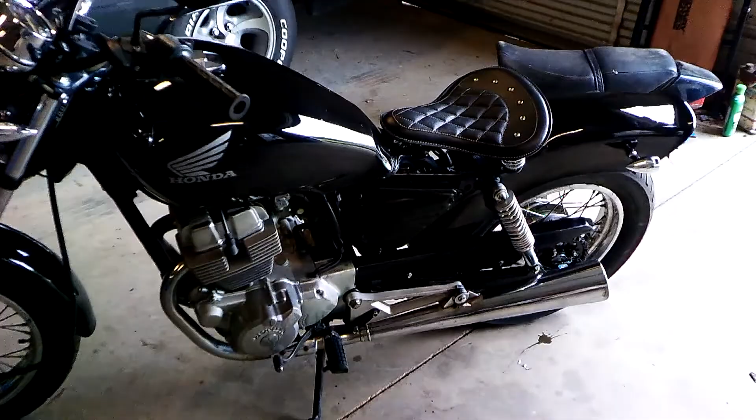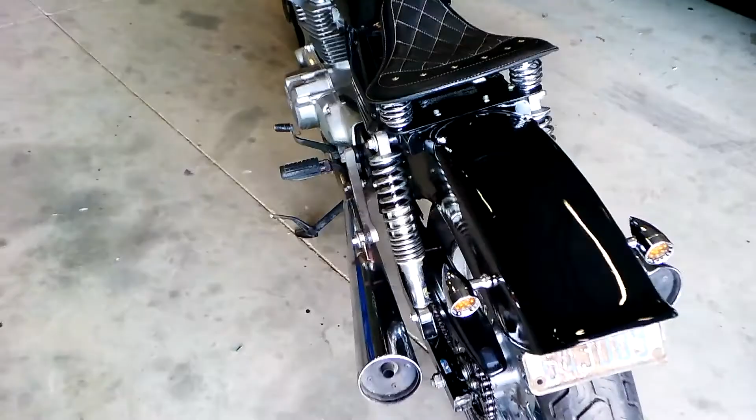Okay, here's my finished Honda Rebel Hawk. This is the Nighthawk gas tank. I bent that tab in. I cut the tab off this air filter. I took the rear pegs off. Here's my tail lights and brake lights.

If you needed to adjust the fender a little more, you could put body shims up under here. I tied my relay and my fuse box up here with black tie wrap. I think these handlebars look alright just like they are. Seems like some people want to change things just to be changing things.

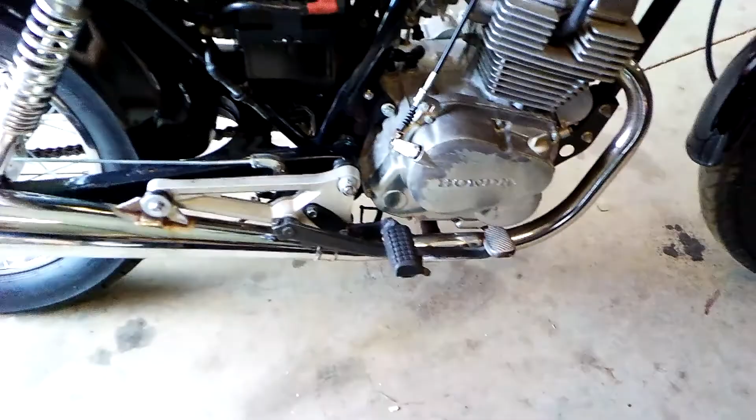Okay, this fender. This is the original Honda Rebel 250 fender. I welded in 13 holes. It would probably be a good idea to try to find an aftermarket fender that you like, maybe similar to this one. Now this is the way Dennis Kirk measures fenders. This is the measurements I took off the Honda fender. I think it'd be a good idea to get you a fender, unless you like welding and bondoing.

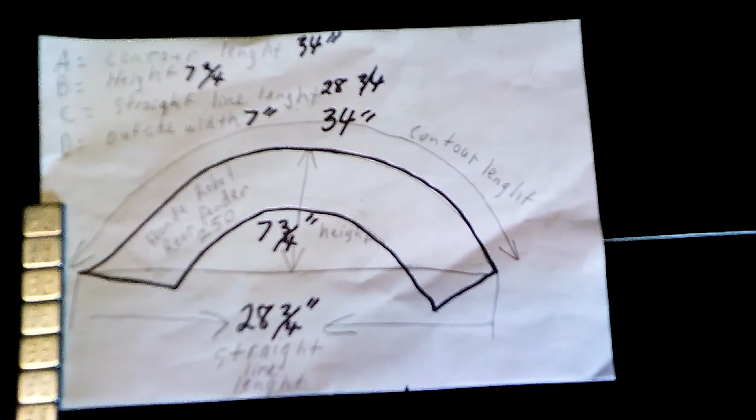Well, after this I'll show you the video of me making the brackets. Going. I'm going to convert my 250 Nighthawk to a 250 Rebel. I suppose you could do about the same thing on a 450, 650, or 750. I've already started this project, so I've already cut the frame off and welded a bracket on here.

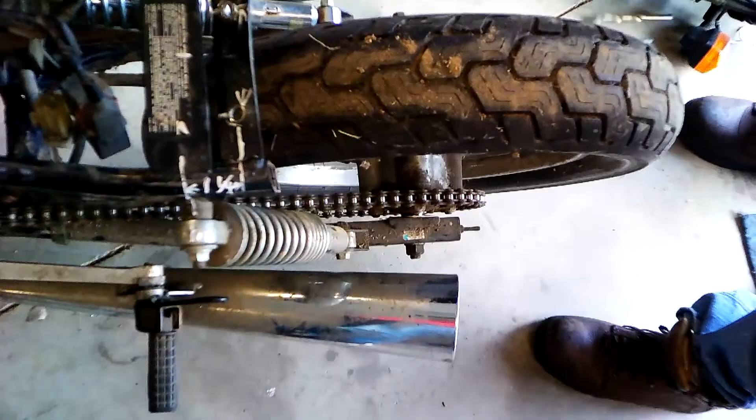Okay. I've cut my frame off 2.5 inches from the center of the shock to the back of the frame. I might should have made that a little bit longer. I don't think it really matters. I welded this bracket on here to hold the fender. The holes in the center of this bracket are 1 1/4 inch from the center of the shock. And they are 3 1/4 apart center to center.

I'm going to give a detailed description of my bracket. I've made several brackets for this thing. I'm going to give a detailed description on my brackets at the end of the video. Okay. My fender here, Honda 250 Rebel fender. Measure 19.5 inches from the end to here and draw a straight line across here. I've already drilled these holes, but we're going to pretend I didn't, because I drill the holes later.

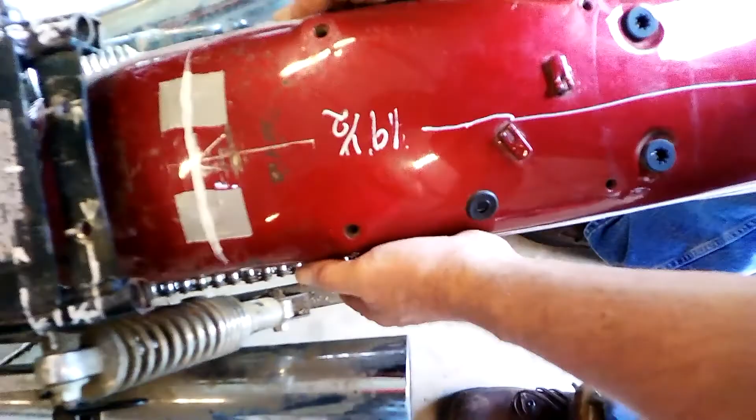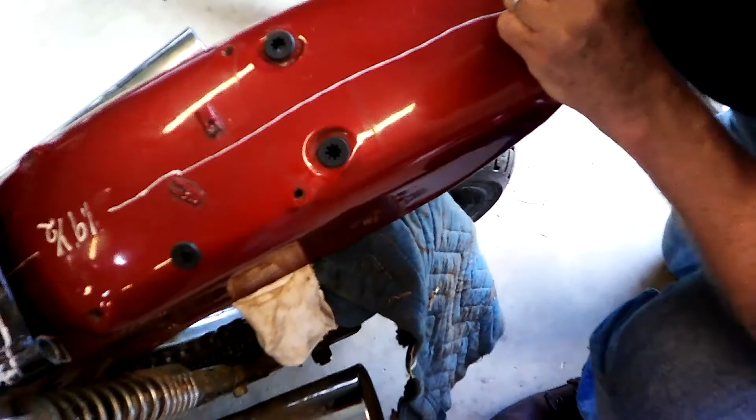Okay, I put my fender in here and center that line I drew in the holes that I've already drilled. It doesn't exactly matter where you drill these holes at, I don't guess, as long as they match everything else. We'll stuff some rags under this fender to hold it into place. And it would be good if you had somebody to help you hold this. My son's holding the camera right now. I'm not. Of course, I've already.

Okay. Got the line. Get it lined up. Look at the rear, get the fender lined up with the tire. Okay. Now this is going to be pretty easy to drill. I've got a socket on here so I don't drill a hole in my tire. It's pretty easy to drill because I'm just drilling through duct tape because I've already drilled it. Okay. That was easy.

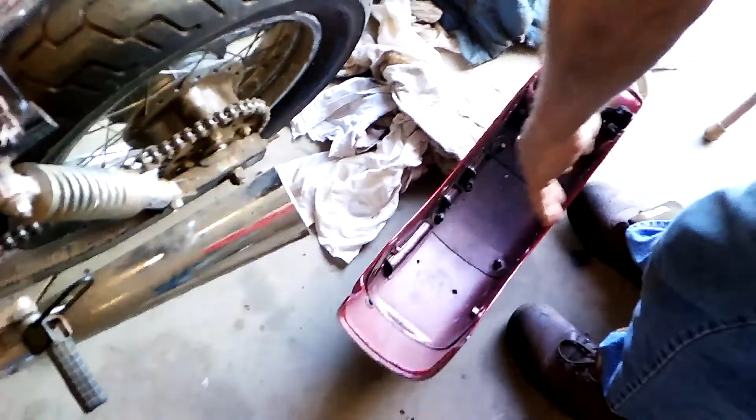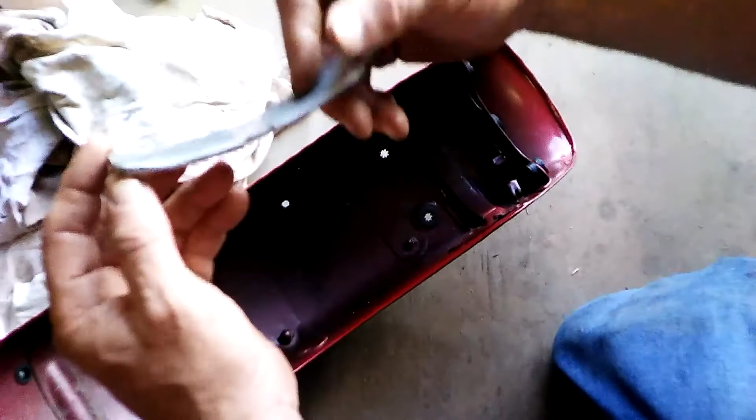I bent this bracket to reinforce the fender. I laid this piece of metal out in the gravel driveway and beat it out to give it the same shape as the inside of the fender. Well, I've already drilled holes in this bracket too. So I would get it centered in these holes. It'd be a good idea to draw a line across here. This doesn't have to be perfectly centered.

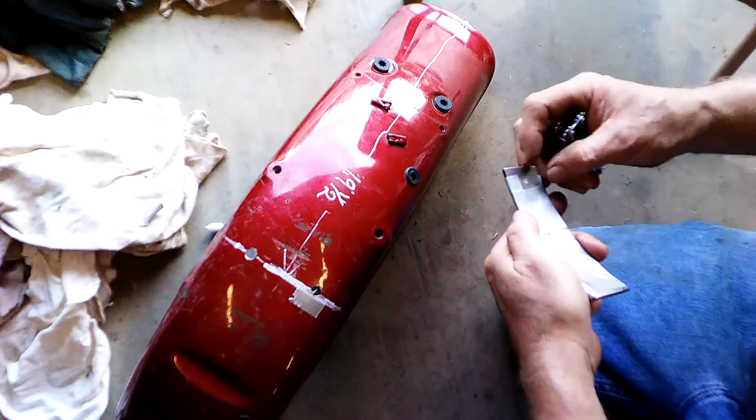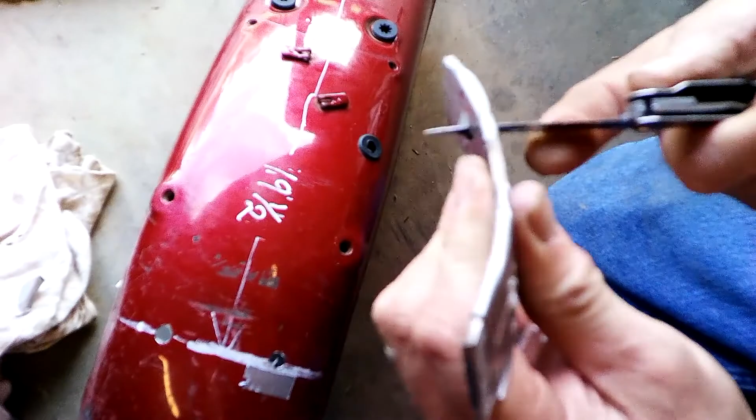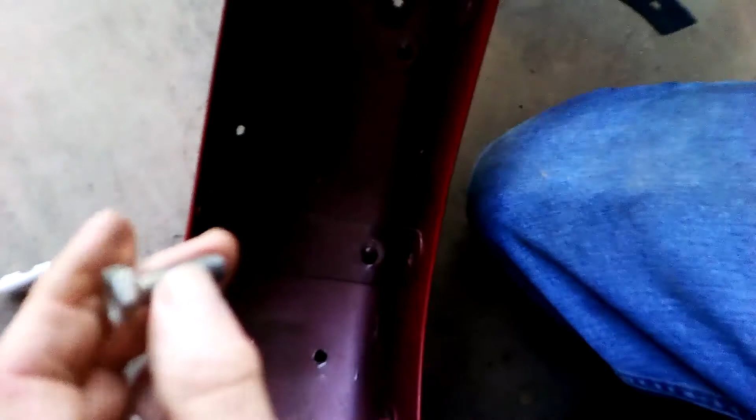Let's pull this tape off. Okay. Put your bracket in here. Mark this. And then drill these holes out, which are already drilled out actually, but we'll say they're not. Okay. I've got some 3/8 bolts. I don't know if you can see where I have ground the underside a little bit, so it will sit straighter in this curve here. These 3/8 bolts are, what, 1 inch long.

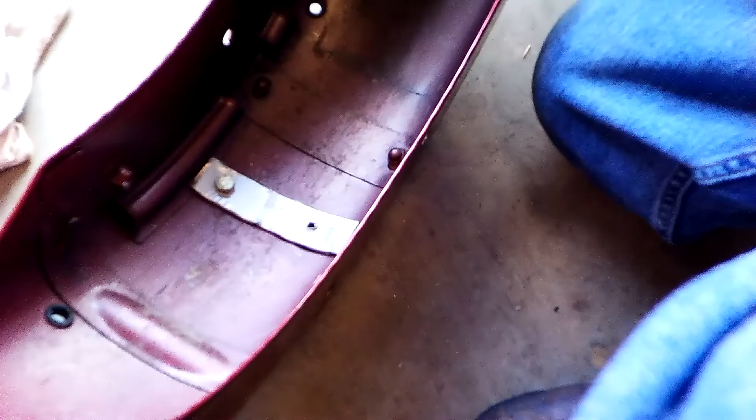So I'm going to turn the ground part out to the curve. I'm gonna put some duct tape on here to help hold these in place. I've already pulled this off. Okay, 3/8 bolt, 3/8 nuts. Okay, when I put this bracket in originally, well, I'm gonna put lock washers on here on my final assembly.

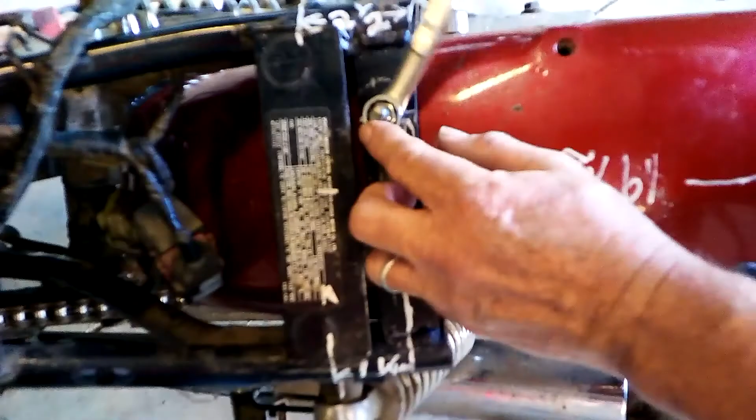Okay, when I put this bracket in here, I put it straight across here. I should have put the bracket at an angle because I had to bend this bracket. I had to bend this bracket to get that fender where I wanted it. It'd be a good solid job for a ratchet. This isn't the final assembly. Okay.

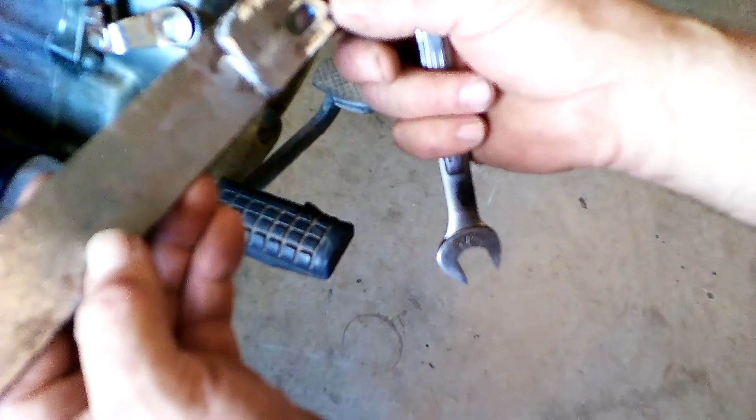Get the fender centered with the tire. Come around this side here. Come around here. This is the bracket to support the bottom of the fender. Now we want the fender to align with the contour of the tire. I would cut this bracket a foot long and then trim it off when you're done. I cut it too short and had to weld a little piece to it.

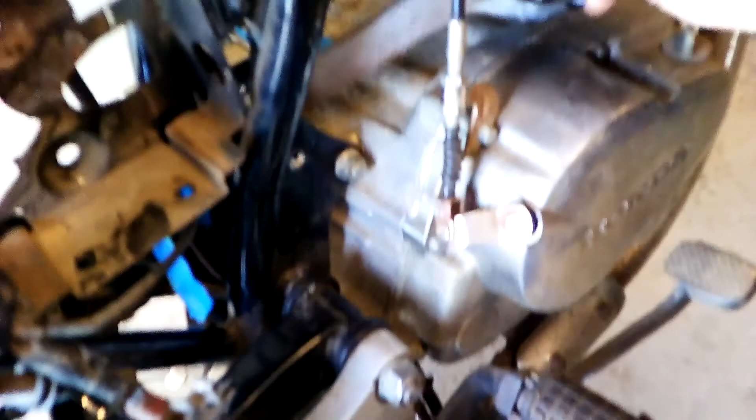I drilled a hole right here, which doesn't particularly matter exactly where you put it because you're going to kind of fit everything as you go. I haven't got a pencil in my pocket. Get this fender where I want it. Hold it against here. And then take a pencil and mark it to where I want to drill it. Then I'm going to bolt this in right here. So let me go ahead and do that. Just stay up there.

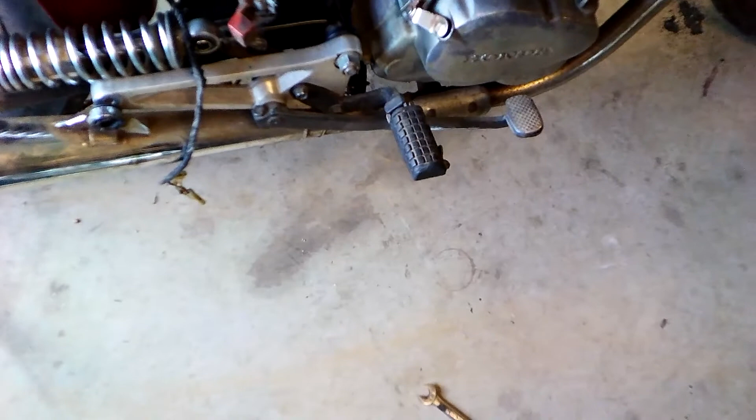Okay, this is a stainless steel bolt. You can get them at the hardware store. They're as good as, probably better than, chrome bolts. Get me a stainless steel nut. Alright, I'm just going to eyeball this to get it straight. I'm just snugging this up for now. I'm going to tear all this apart.

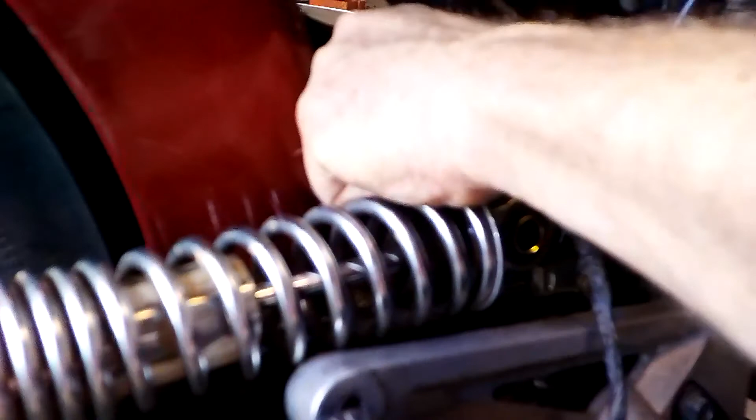I need to take this fender. I need to weld all these. I'm going to leave these holes for my turn signals. I'm going to weld all these holes in and clean them up and paint this fender.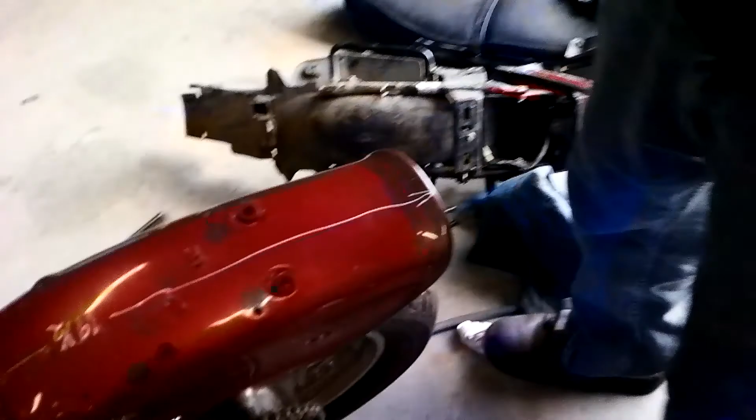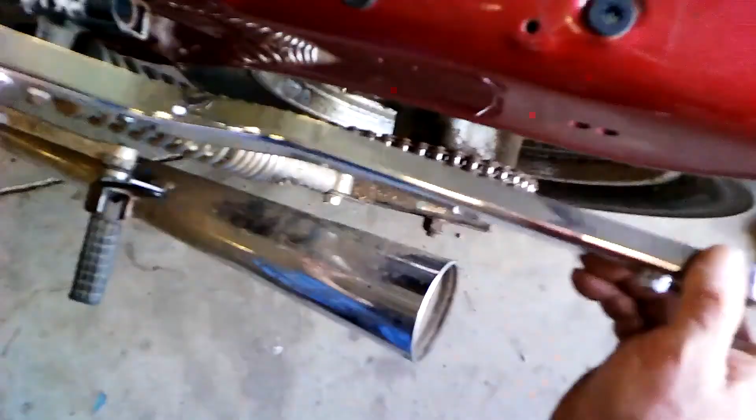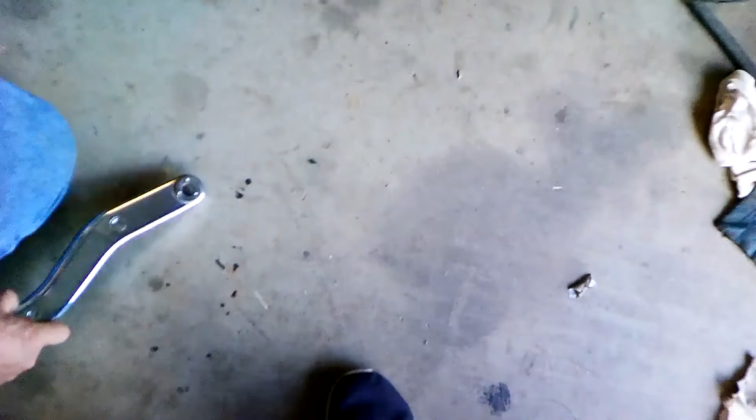The Honda Rebel strut fender brace, I bought some, and they just do not line up with the fender. If you wanted to, I'm sure you could find a brace, or maybe even cut this one down shorter, maybe drill your hole here if you had to have it. I'm just gonna leave it off. I don't recommend you let anybody ride back here. Nobody needs to be riding on a Honda Rebel anyway, or a Honda Rebel Nighthawk, or a Honda Rebel Hawk.

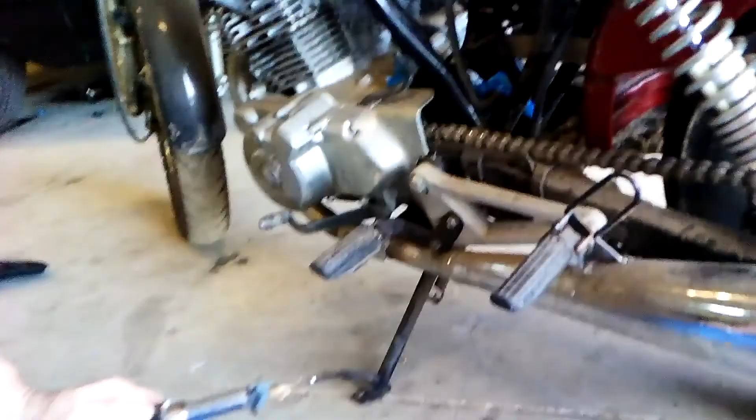Okay. I've got my fender lined up pretty good. I've got my bracket on here. Where this bracket is sitting is where I'm gonna drill this hole, which I've also already drilled. I don't really care if it's in the dead center of the fender because you can't see it anyway. I've got my socket on here to keep from drilling through the tire, so I'm just gonna drill through the fender and put a bolt.

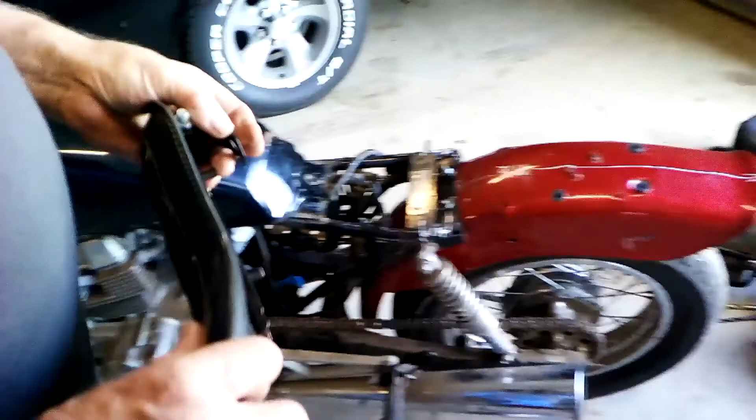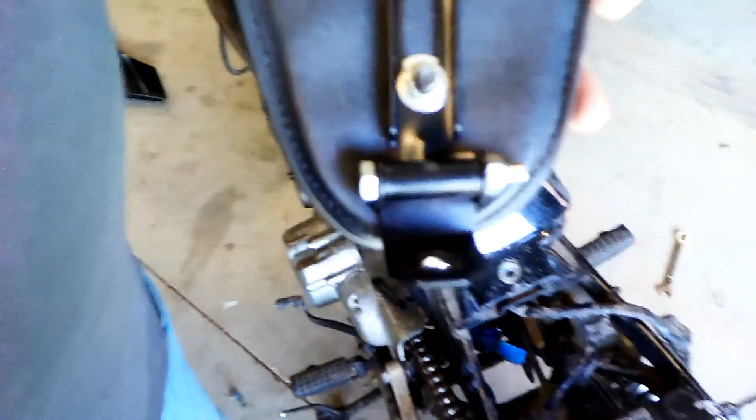I'm just going to start this bolt here because I'm going to tear all this back down to finish it. Okay, I'm putting a bobber seat on here. Found the original bolt and put it right here. I also think I'm going to spot weld this bracket here. It's just kind of bent around there, not very sturdy. Drop this bolt in the hole for now. I can't find the correct bolt.

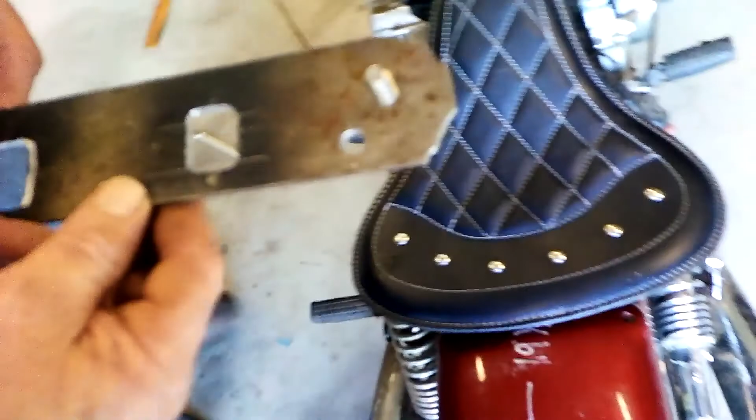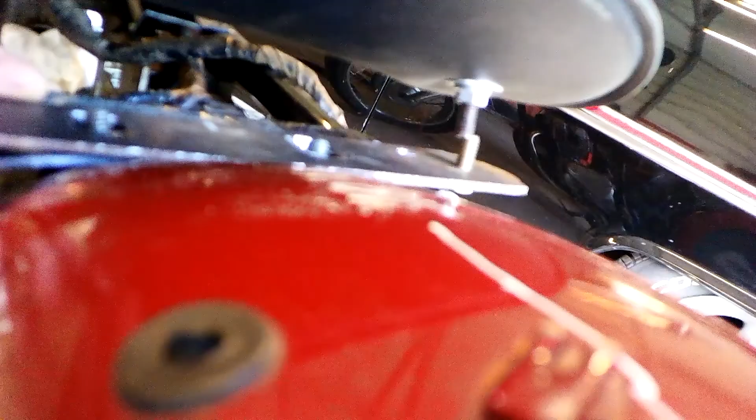Okay. This is the bracket I made to bolt the springs of this bobber seat. I just centered up this bracket, measured from inside out. You can see the bolts on this bobber seat line up pretty good with the bolts on this bracket for the bottom spring. I should put the correct bolt in here, but I can't seem to find it. I've got all this centered up pretty good.

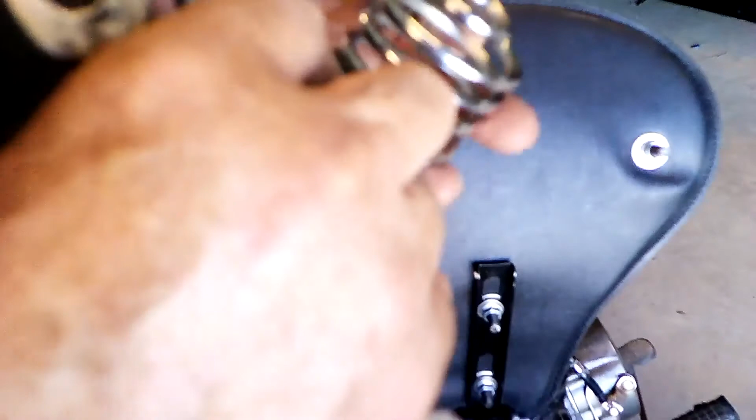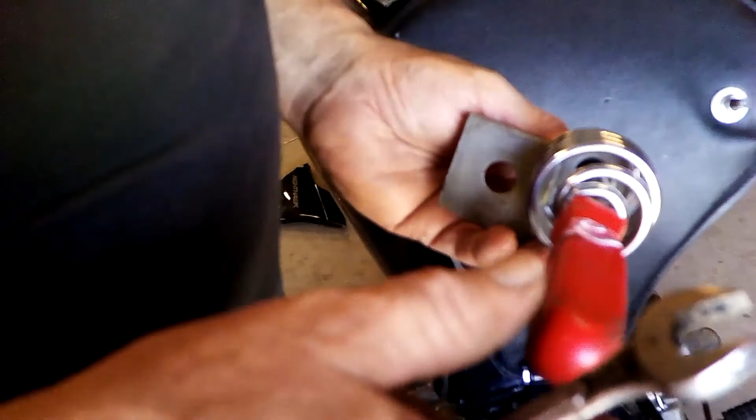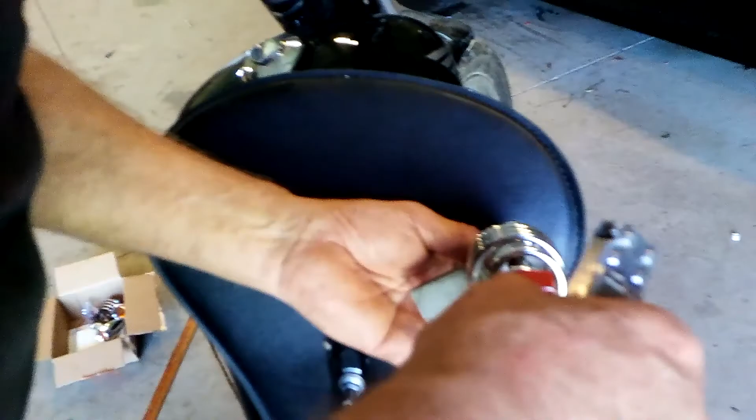Okay, these bobber springs are a pretty tricky thing to put on. You got to put your washer in here. Put your nut in there. Get everything in alignment. I put this piece of steel, this wedge looking thing, in here so I can put my wrench. Let's see. Okay. I'm gonna just try to start this thing with my knife here. This is not easy. Okay, I have got it started.

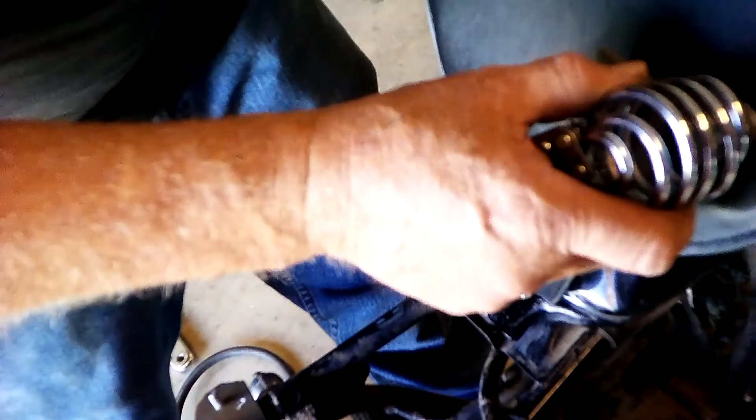You take your wrench and go in here where I've got it wedged open. And I guess you can just go on around and around with this first one. You can't do this on the second one. Wouldn't be a bad idea to use a lock nut on that.

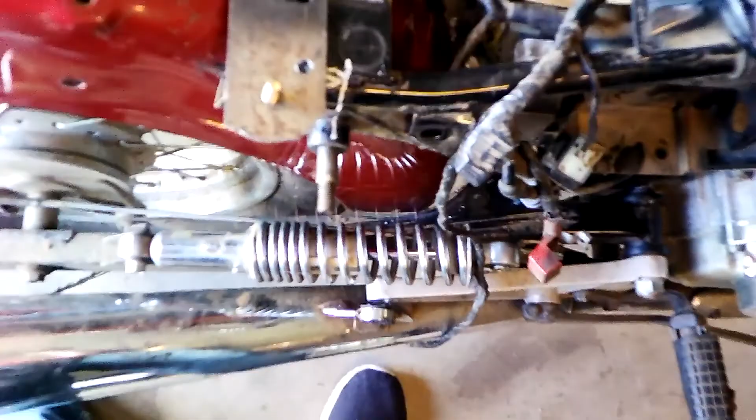This bottom bracket, which I will describe at the end of the video better, I've rough machined the circumference here. Some people use a protractor, I believe. I just took this, it's a spring off a lawnmower. I was thinking about using them. So I'm going to just trace around here and I'm going to grind that.

Okay, I lined all this up. And I drilled a little bigger than a 1/4 inch. I'm going to put 1/4 inch bolts in here with lock nuts and tighten this brace down. But then this goes on the brace and not the motorcycle itself.

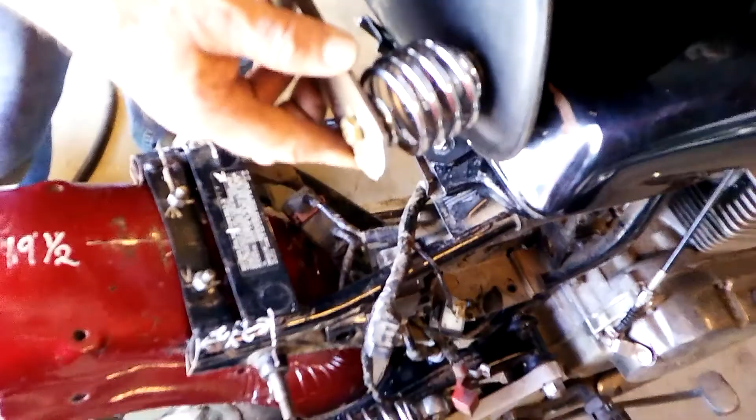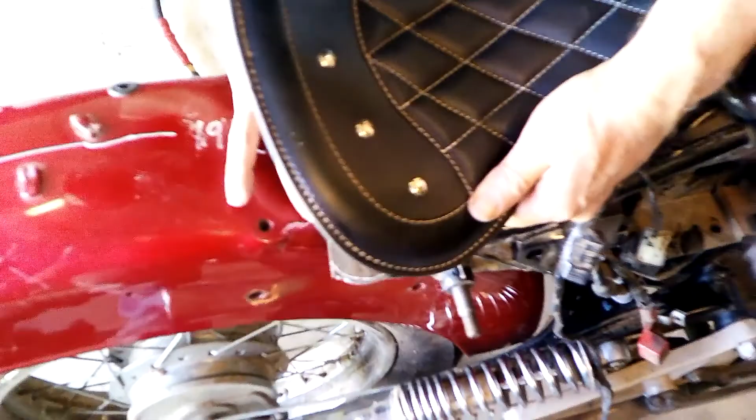I can bolt this bracket on here like I did this spring bracket without having to stand on my head. I can bolt both these springs on here, lower it down. I think I can get in here and put my bolt in after I've put my springs on. My spring, make it sit level.

Well, I'm going to tear all this back apart, fill in my holes, paint it, grind this better. Take this front bracket off, the bottom bracket of the fender, and clean it up a little bit and paint it. I'm going to stop the video now, and I'm not going to video me filling all these little holes in and painting this fender with a spray can.

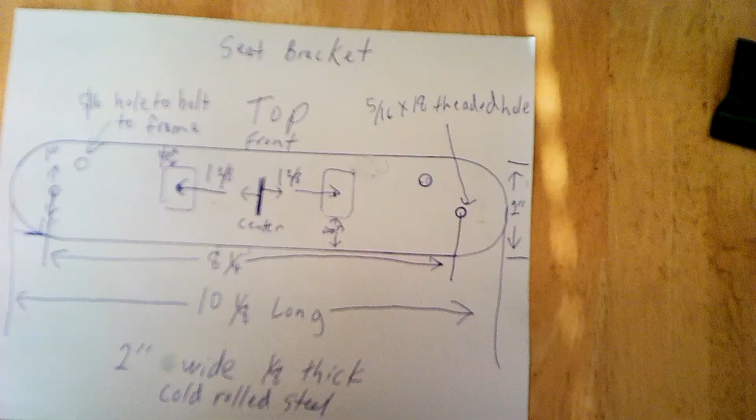Okay, here's the drawing of my seat bracket. It's 2 inches wide. It's made out of a piece of 2 inch wide and 1/8 inch thick cold rolled steel. It's 10 1/8 inches long. The spring bolts are 8 1/4 inches from each other.

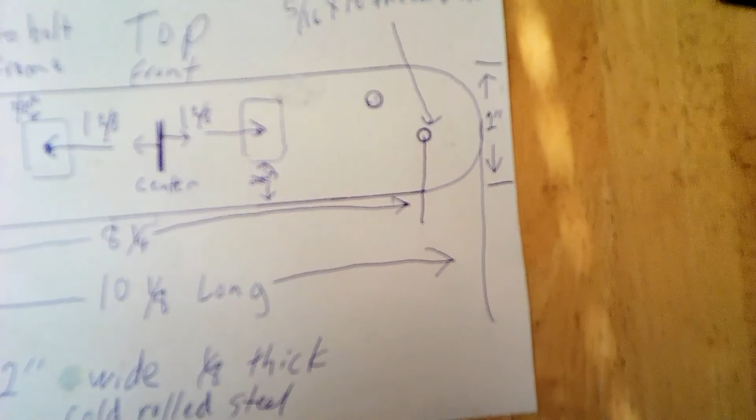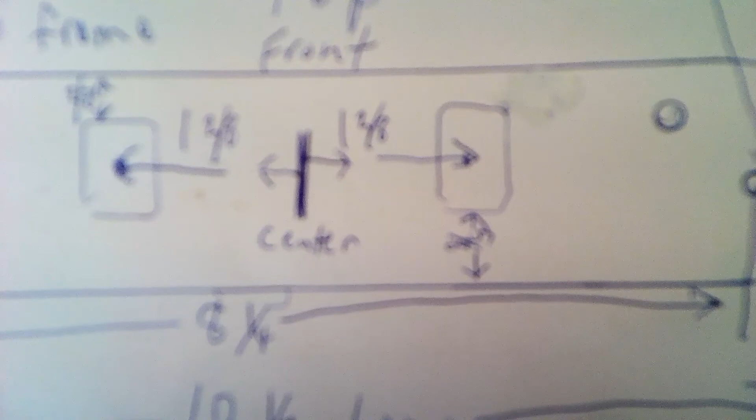And in the center, these holes here are just for clearance for the bolts to hold the fender on. I made them rectangular because I was using the milling machine. You could drill them out round or however is the best way for you to do it.

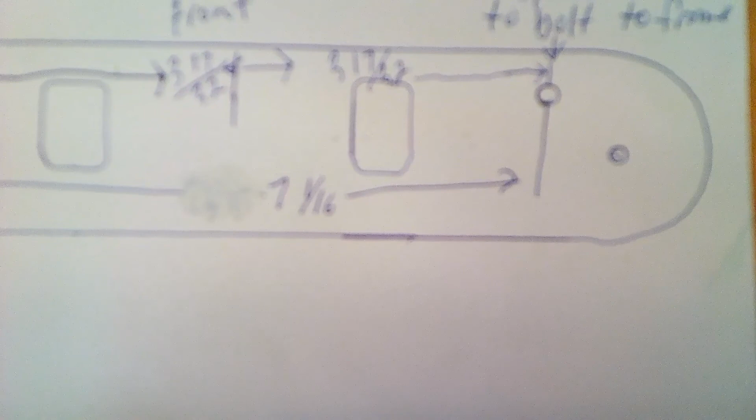Okay, here's my holes that go to the frame. Mine are 7 1/16 inch apart. You might want to measure your frame and get them in the middle of your frame. Could be a little bit different, I don't know. Drilled them 5/16, put 1/4 inch bolts all the way through them.

Okay, my spring bolt holes. I tapped them out. They're 5/16 by 18 threaded holes. Here's my measurements for my clearance holes. That's not so critical. If you put your fender bolts on the same way I did, that should be right.

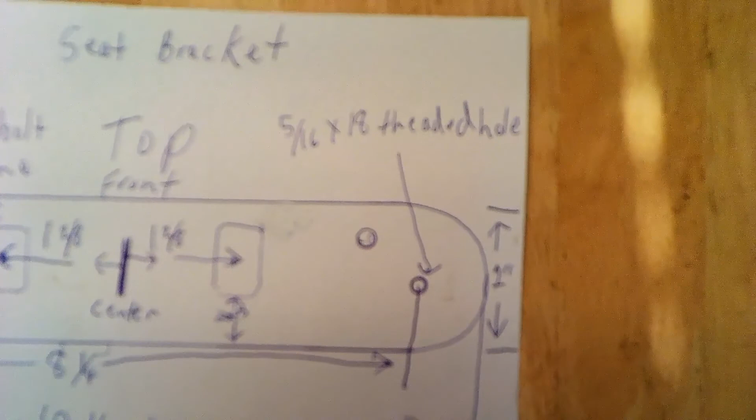When I put this bracket on, bolted it down, this bottom edge here hit the top corner of my fender bracket that I welded on to hold the fender on. That's why I'm gonna weld these washers, about 1/8 inch thick. I'm gonna weld them on so the weight of the seat and the rider will be on the frame and not resting on the edge of this bracket, pushing down on the fender.

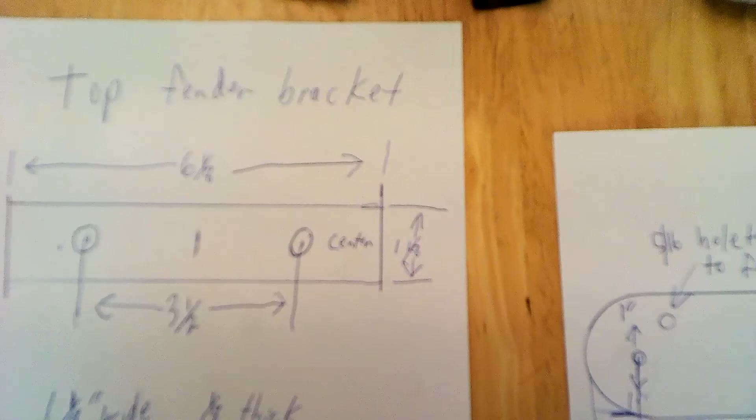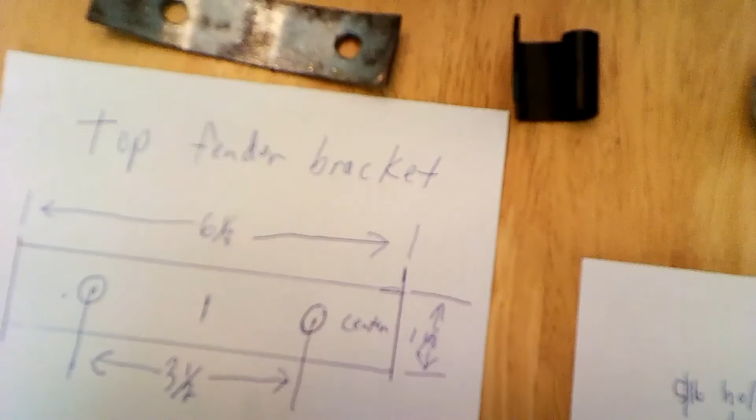Here's my top fender bracket. It's 6 1/8 inch long. It's made out of 1 1/8 inch wide and 1/8 inch thick cold roll steel. The holes are in the center, and a little bigger than 3/8 inch holes, 3.5 inches apart.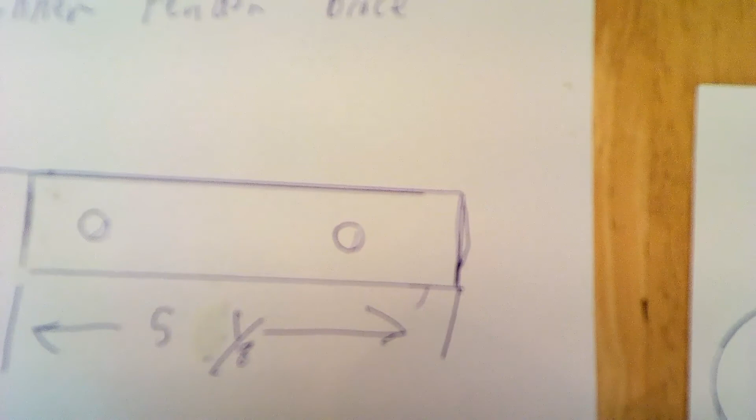Here's my inner fender brace. It's 5 1/8 inch long. I bent this curve to match the curve inside the fender. This is made out of the 1 1/8 inch by 1/8 inch thick steel. It's shorter on this end because there's a place for the wires to run through, runs along inside the fender.

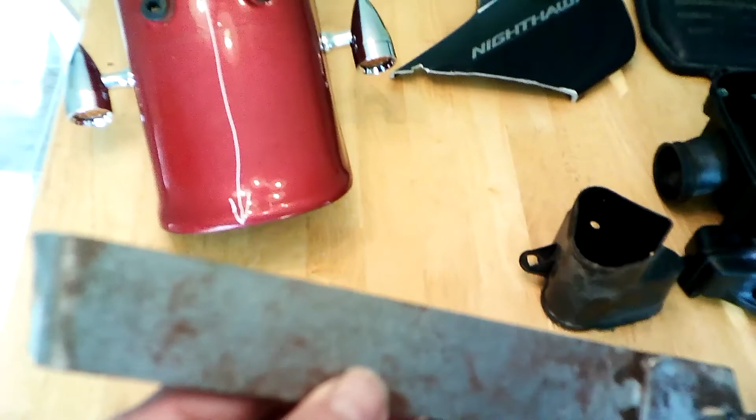Okay, here's my bottom fender bracket. You need to cut off a piece of steel like 1 foot long. This is the same size as the last bracket. I've got this bent down at an angle to match the fender. Or sort of matched. Well, this fender is not sitting at the same angle as it would be on the bike.

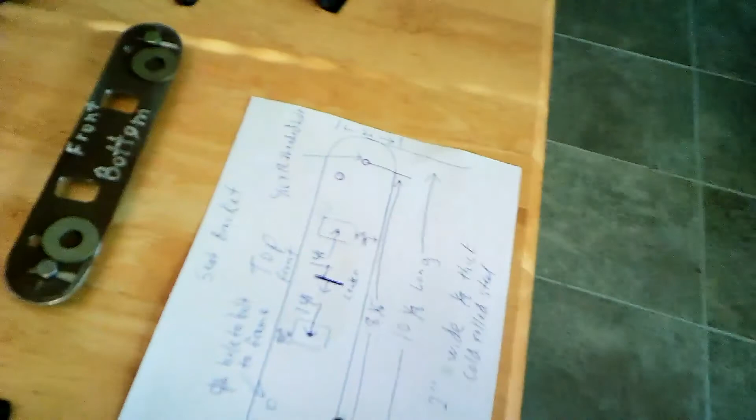I went ahead and drilled my hole here. I drilled a hole near the motor mount, or in the motor mount on the frame, as I showed you earlier. I put this bracket in, just held it up against there, and then marked this hole here through the hole in the motor mount. I had trouble getting exactly where I wanted it, so I slotted this hole out so I could move it back and forth.

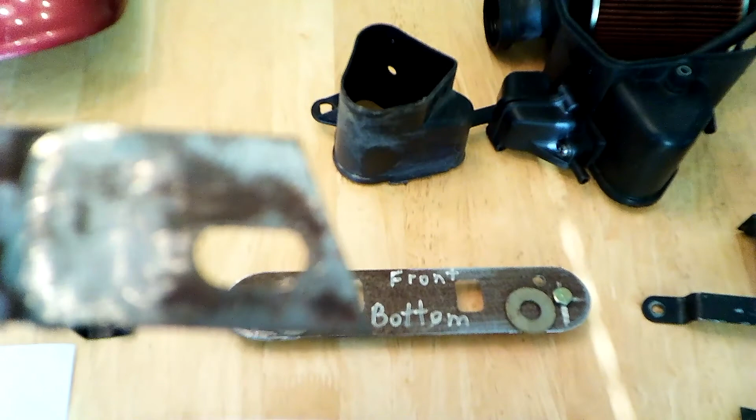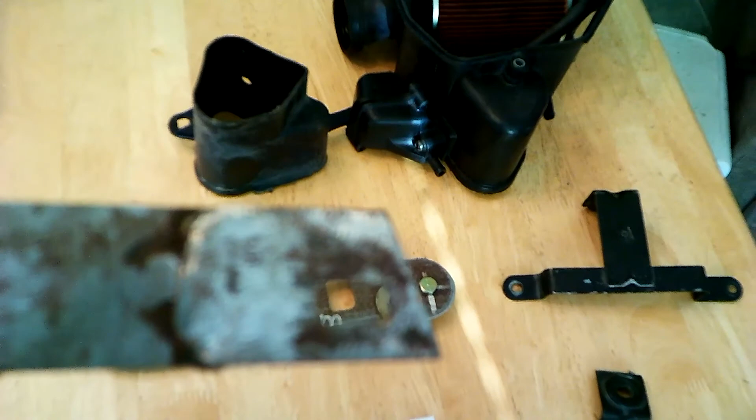After you get this bolted in and your fender lined up like you want it, you can draw a line using the motor mount, or the frame, I don't remember, and cut this. This angle here is just the shape of the frame there. I made mine too short. I made it long enough, then I cut it too short, so then I welded a piece back on it.

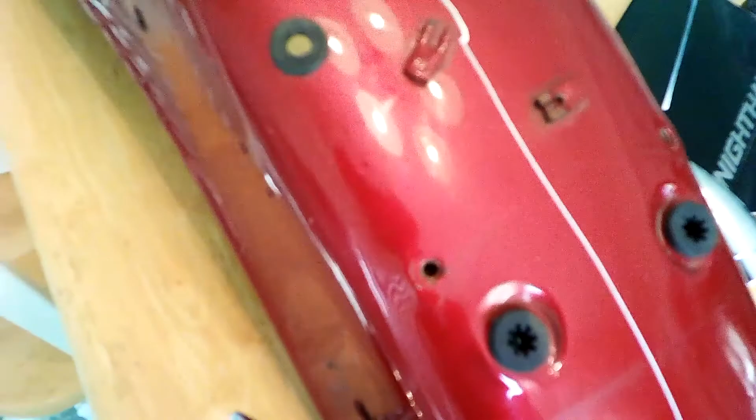Okay, here's my fender. This fender is 6.5 inches wide on the inside. I don't know if this would be wide enough for a 750 Nighthawk if you're trying to do this on a 750. There's where the wires run through, why my bracket wasn't the equal length from the holes.

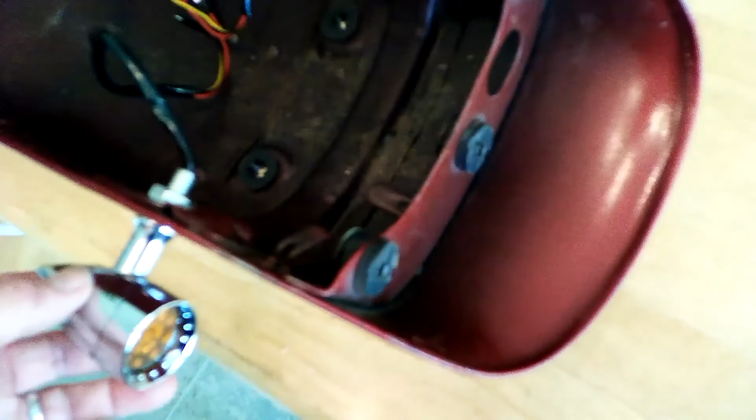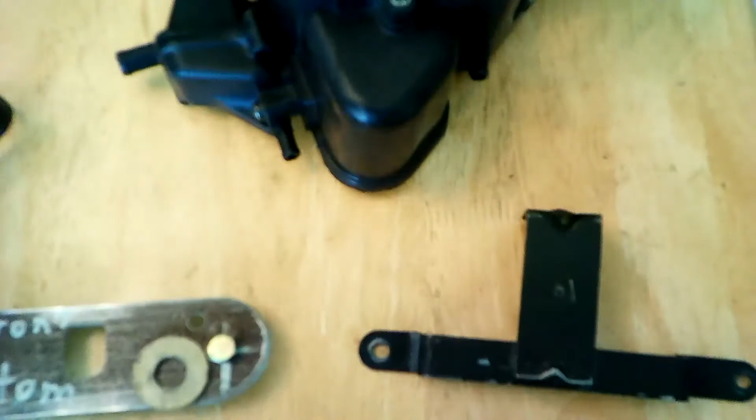Got these lights from what the vice grip calls the jungle store. They're metal. They look pretty good to me. I had to take the toolbox off to have clearance for this bracket. I tried to make a battery cover out of this piece, but it just didn't want to work out. I just didn't do it.

I think this breather will probably breathe better than them little cheap Chinese filters a lot of people use. I did cut an extra hole in here.

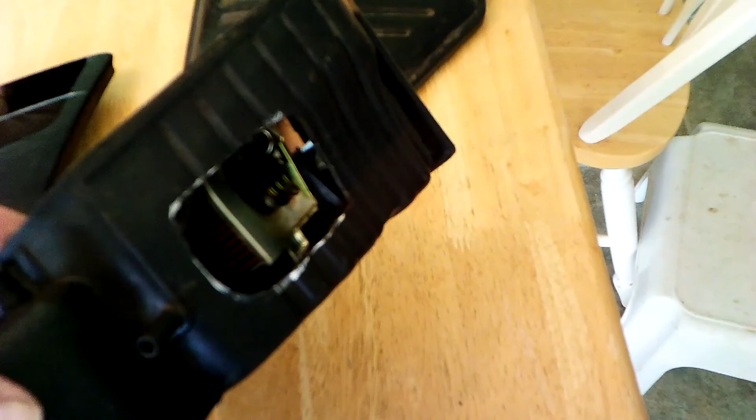Next time I'm going to kill the flies before I make my video. Must be some peaches in here.

Here's my battery bracket. You know, this held this on. I cut that off and deburred it real well. I may make another bracket. I may get a piece of stainless steel later on and make a better looking bracket than that one.

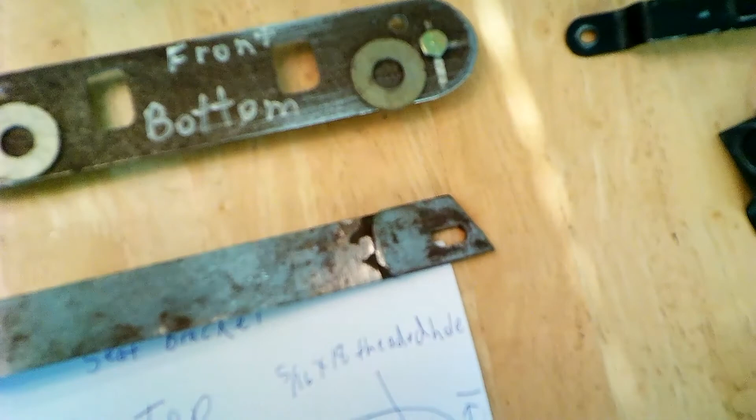This is my seat bracket I was talking about earlier. I may try to reinforce it a little bit. Maybe put a little spot weld here and here. It's just a little flimsy looking to me. I guess y'all need to see this.

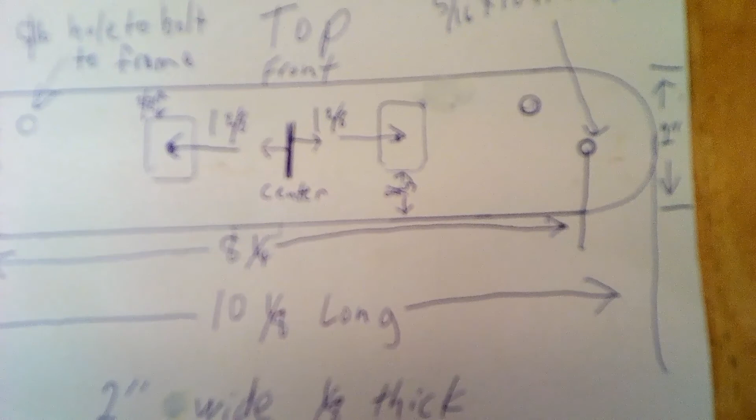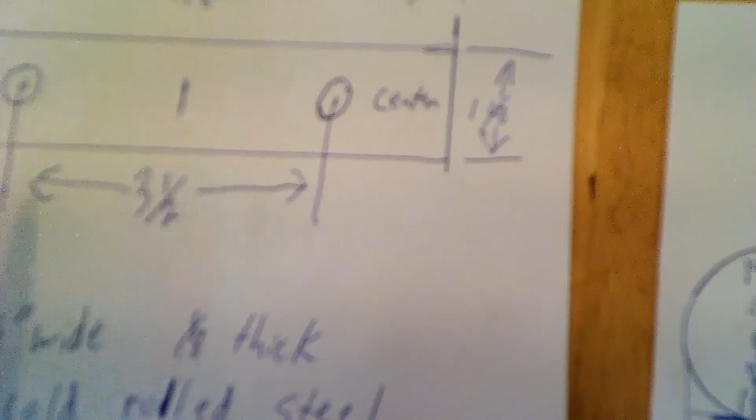This is the top fender bracket. I wound up bending it. I put it in flat across the top there. I should have trimmed it just a little bit here and here and set it in at an angle, and I wouldn't have to bend it as much or any.

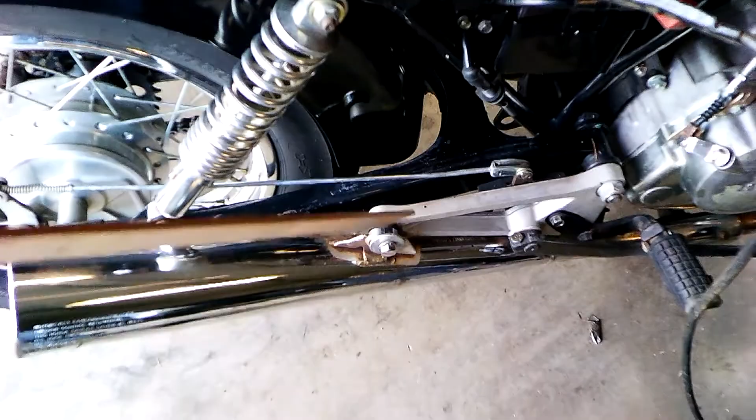Okay, I've got a minor problem. The bottom of this fender hits the inside of this swing arm. There's a seam on the inside of this swing arm. I may try to grind a little bit off. I need to move my fender over.

One thing I could have done, my measurement from my bolt holes to the end of this fender was 19.5 inches. If I'd have made it 22 or 23 inches, this fender would have sat up here, and of course it would have been rolled back a little further. Probably wouldn't hardly have been noticeable. Just however you want to do it.